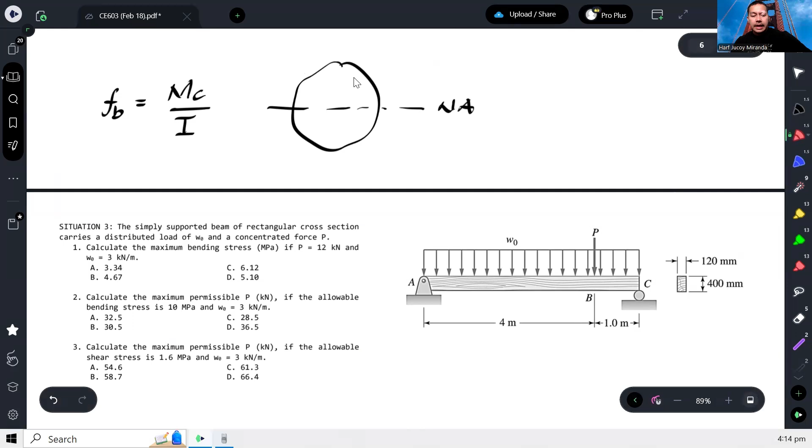Okay, yung moment tapos yung distance natin, pag sinabing C, diba. Ito kunwari yung neutral axis. So yung C is yung location nung point na hinahanapan mo ng flexural stress. Halimbawa, itong fiber na to.

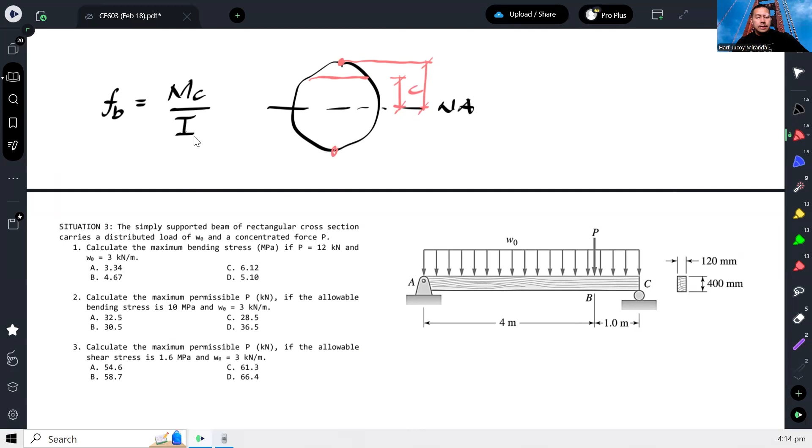So yung C is distance from the neutral axis. Pero kung gusto mo yung maximum, doon ka sa pinakadulo dapat. Yun yung pinakamalaki na C, o sa kabilang dulo. Tapos yung I is the moment of inertia. Pero bago yun, kailangan nating malaman, kasi maximum kailangan mo malaman yung maximum moment, in this case.

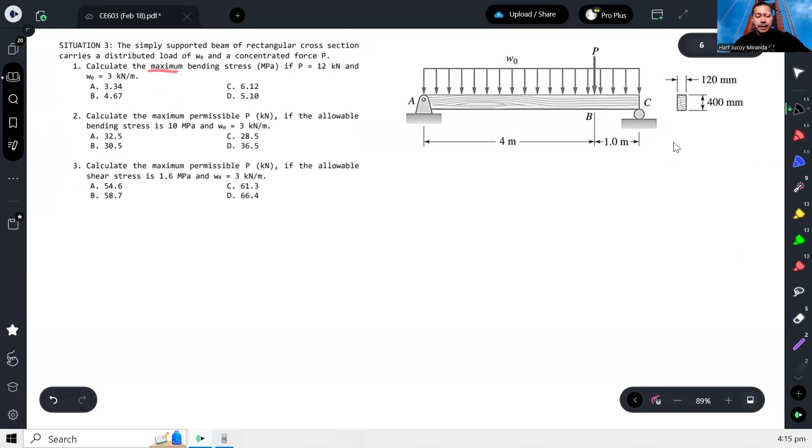So for the first problem, sabi niya W is 3, tapos yung P is 12. Okay, so kunin natin yung reaction.

Pakita ko na lang sa calcu ha. Wag na, isulat ko na para malinaw. So moment tayo sa A.

Doon naman tayo sa uniformly distributed load. So that's 3 times buong length is 5. Tapos yung moment arm niya is 5 over 2. Okay, clockwise yung rotation.

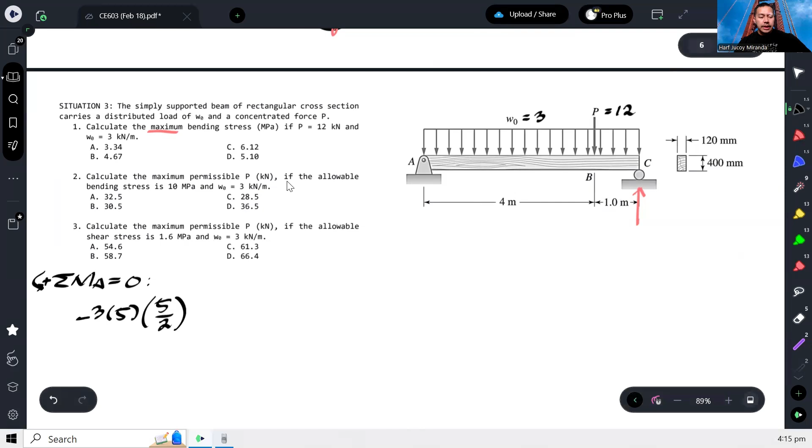And then we have 12, moment arm is 4, so again clockwise din. Itong distributed load, pababa kasi yan, so pag umikot yan dito, clockwise. Ito rin, clockwise. Tapos ito naman, counterclockwise.

Yung reaction sa C, counterclockwise, moment arm is 5. So therefore yung reaction sa C can be calculated: we have 3 times 5 times 5 over 2 plus 12 times 4, that's all over 5. That gives us 17.1.

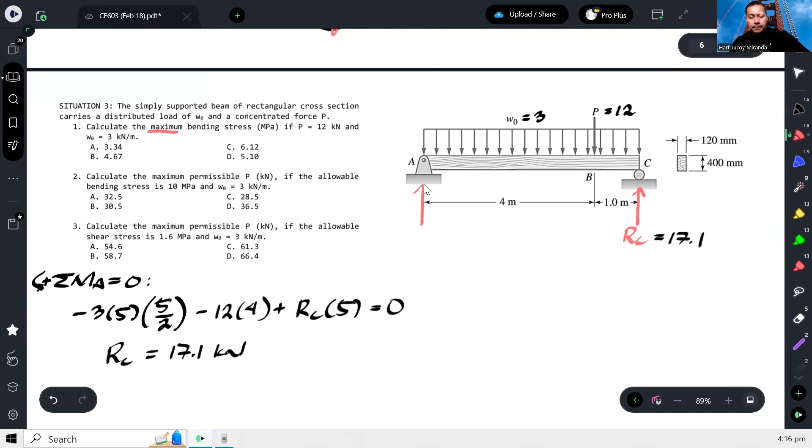Tapos syempre meron din tayong reaction sa A. Para naman sa reaction sa A, mag-summation na lang ako ng forces. We have RA plus RC minus 3 times 5 minus 12. So that's 9.9.

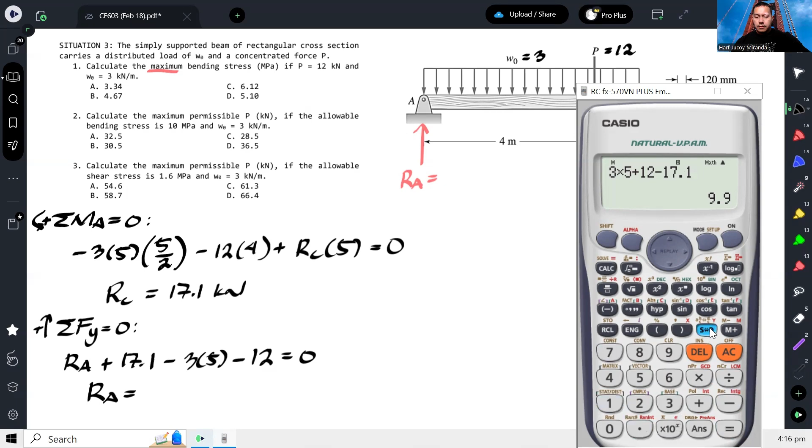Okay, ngayon pwede natin i-drawing yung shear diagram. As you can see, meron ditong 9.9. Tapos meron ibang kulay yung shear diagram.

Meron ditong 9.9, tapos bababa tayo dahil dun sa uniform load. We have 9.9 minus 3 times 4 lang muna, kasi meron ditong concentrated load sa B, so hanggang 4 lang muna. That gives us negative 2.1.

Tapos may concentrated load na 12, so bababa tayo ng 12. So 14.1.

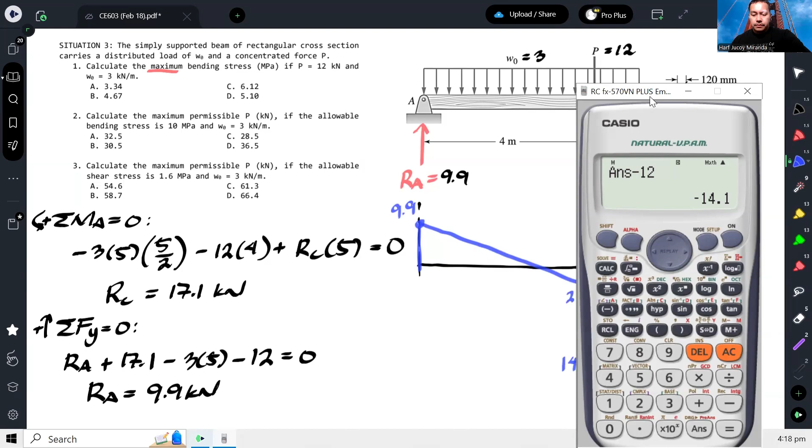Okay, and then for this from B to C, meron tayong area na—rather 3 pala, 3 times 1. So bababa tayo ng 3 times 1, 3 yung magnitude ng W. So that's negative 17.1.

Lastly, dito sa part na to, meron tayong concentrated load na 17.1 upward, so this would be 0. Yan, so yung itsura ng shear diagram natin.

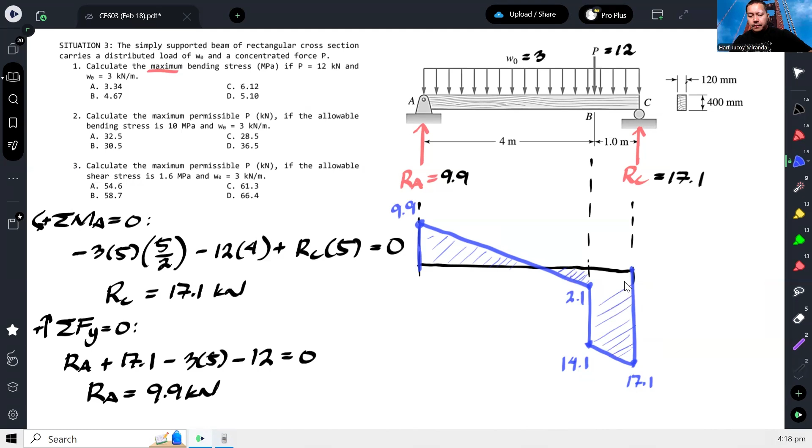Okay, so in this scenario we are only concerned with maximum moment, kasi maximum bending stress yung hinahanap natin. Dito, halata na dito yung mangyayari. Kailangan natin itong malaman kung nasaan ito.

Okay, kung yan ay x, itong kabila we will call this 4 minus x. Again, by ratio and proportion you can calculate that. Dito na lang sa gilid, x over 9.9 is equal to 2.1 lang ito.

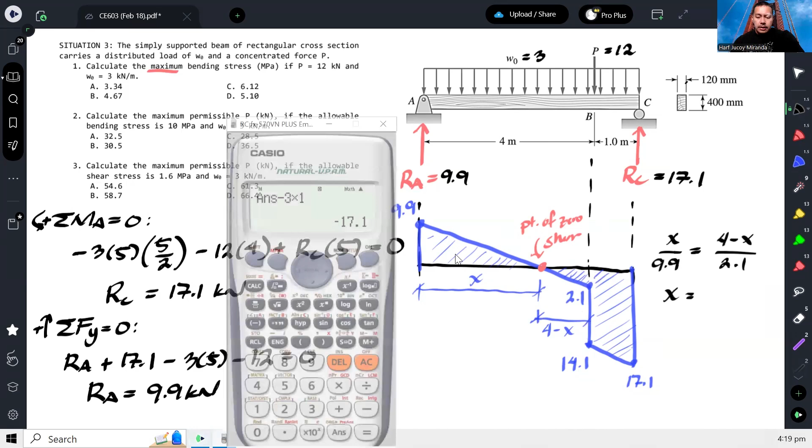Ay sorry, 4 minus x pala muna. 4 minus x over 2.1. So ma-solve mo yung x. Okay, so that's 3.3.

Okay, so from there pwede na natin malaman ano yung maximum moment. Sabi ko nga kanina, parang kung i-drawing mo pa yung moment diagram, bali ganito lang yan. Bali 0 dito yung moment, tapos magkakaroon lang yan ng value dito.

Magkakaroon yan ng value dyan, at yan na yung maximum. Kasi after yan, ima-minus mo na to, di ba. Area na to positive, so magpa-plus. Tapos pag lumagpas ka, ito negative, so bababa na yan. Tapos ito negative po, so bababa na yan, maging 0. So ito na yung maximum yan.

At yan ay area lang nito. Okay, so therefore our maximum moment is 1/2 base na lang.

1/2 base times height na 9.9. So that gives us 1/2 base times height. That gives us 16.335.

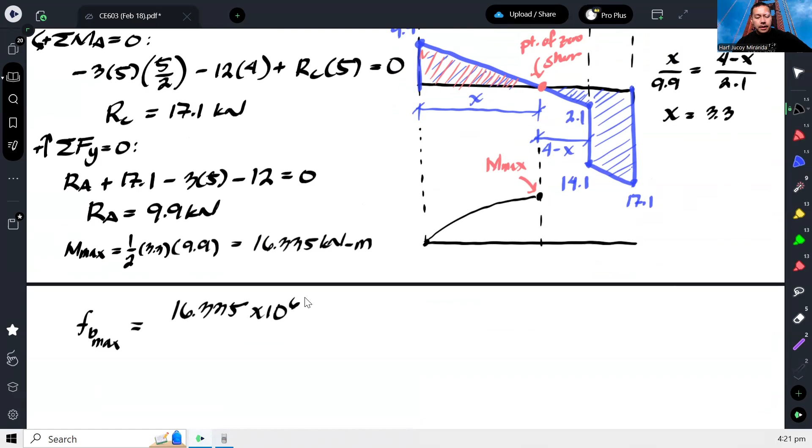Okay, so we are now ready to calculate the bending stress. The maximum bending stress would be equal to M, which is 16.335. Gagawin natin Newton millimeter kasi ang goal ko diyan maging megapascal. Yung C natin, ito yung cross-section, di ba? Lakihan ko lang. Okay, so ito ay 400. Ito ay 120.

So yung neutral axis, since rectangle lang naman, nasa centroid, which is nasa gitna. Nandito sa gitna, no? So ibig sabihin, from the neutral axis, mangyayari ang maximum bending stress sa extreme fiber dito, either sa top or sa bottom. Kahit saan naman, wala namang in-specify kung maximum compressive or tension. So basta bending stress, piliin lang natin yung mas malaking distance. In this case, parehas lang naman yon na 200.

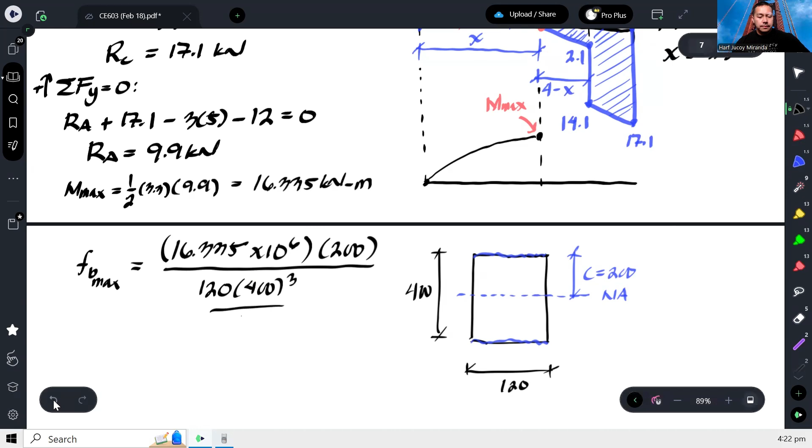Okay, so therefore this is times 200, MC over I. Tapos yung I naman natin, dahil rectangle lang yan, so BH cube over 12. Ayan, okay? So lahat naman yan naka-millimeter tsaka naka-Newton millimeter, kaya magiging sagot mo agad diyan is megapascals.

So that gives us 5.10 megapascals. Okay, so that's letter D.

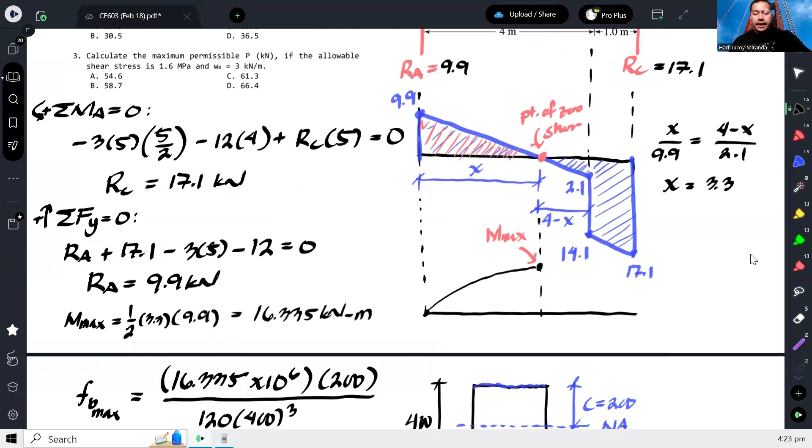Next, calculate the maximum permissible P. Oh nga pala, bago tayo mag-proceed doon, another way of calculating the maximum moment is kung ayaw mong i-drawing yung shear diagram, pero alam mo na somewhere dito yung maximum moment, pwede ka ulit mag-method of section. Ayan, okay? So pag nag-method of section tayo, kakat mo yan, isolate mo.

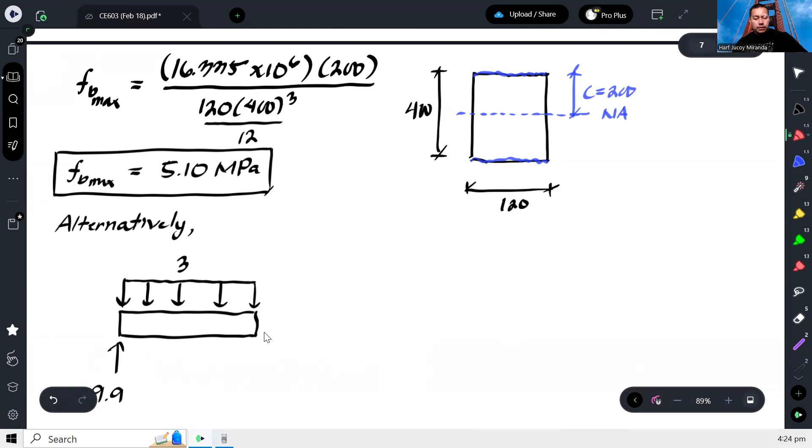Kunwari yun, kinat ko na, in-isolate ko na yung left. Meron ditong 9.9, tapos meron ditong uniform load na 3. Ayan, no? Tapos dito may expose yung shear. Pero isa-set mo na 0 kasi hinahanap mo yung point of zero shear. Tapos kung yan ang point of zero shear, doon din lalabas, ito na yung maximum moment.

Okay, tapos ang gusto mong malaman, nasaan to? Kunwari hindi mo alam, so paano mo malalaman? Again, summation lang ng forces. So we will have 9.9 upward, tapos downward yung 3 times x. So lalabas sa x ay 3.3.

Okay, pag nakuha mo na yon, pwede ka naman mag-summation ng moment dito sa point na to. Let's say point O, o wag na lang O, point M na lang siguro. Point M, assuming counterclockwise positive. So we will have 9.9 times x clockwise. Tapos we will have 3 times x times x over 2.

Kasi di ba kalahati lang ng ano nito, x, yung moment arm ng resultant nitong uniform load. Tapos yan ay counterclockwise, ito ay clockwise. Ito ay counterclockwise, and then counterclockwise yung M max. So therefore yung M max dito dapat same lang doon sa na-compute natin, which is same nga lang, 16.335.

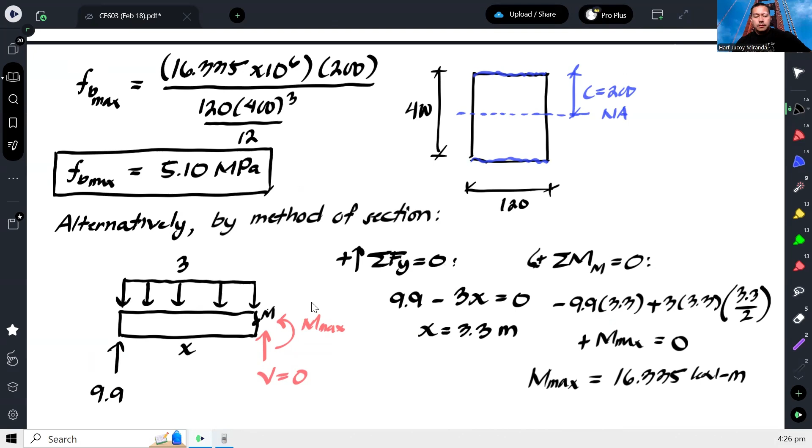Okay, pwede rin ganyan. Tapos pagkatapos ito, MC over I na ulit. Okay, pwedeng method of section, no? Okay, so that's for number one.

Number two, calculate the maximum permissible P if the allowable bending stress is 10 megapascal and the uniform load is 3 kilonewton per meter. So pinapahanap yung maximum P. Okay, so dito naman, nangyayari diyan ganito.

Kapag yung P natin hindi ganun kalaki, ganito yung nangyayaring shear diagram. So from reaction, tapos yung point of zero shear mo, somewhere dito, no, somewhere diyan, o dito, o dito. Pero kapag yung P mo is large enough, ang magiging itsura ng shear diagram diyan is hanggang dito lang, tas biglang bababa. So ibig kong sabihin, yung point of zero shear mo is kung nasaan yung P mismo.

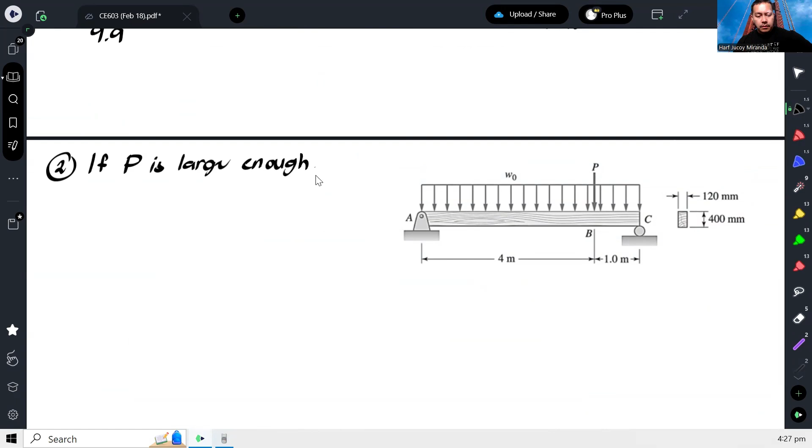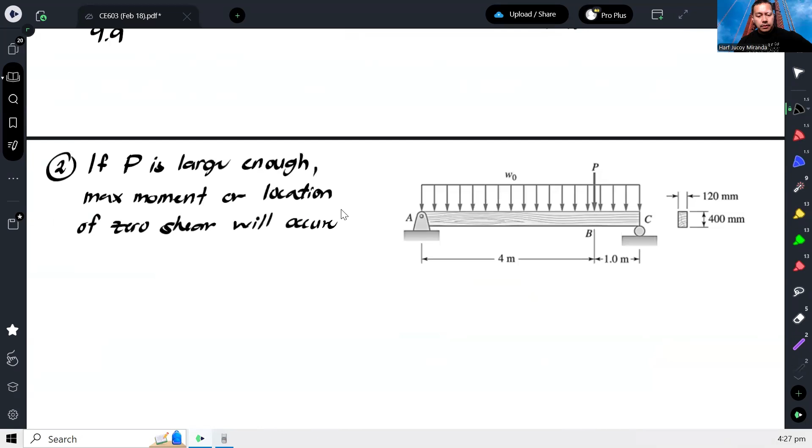Okay, number two. If P is large enough, okay, maximum moment or location of zero shear will occur under P. So ibig sabihin, ganito yung magiging itsura ng shear diagram diyan. Ganyan, so nandito yung point of zero shear.

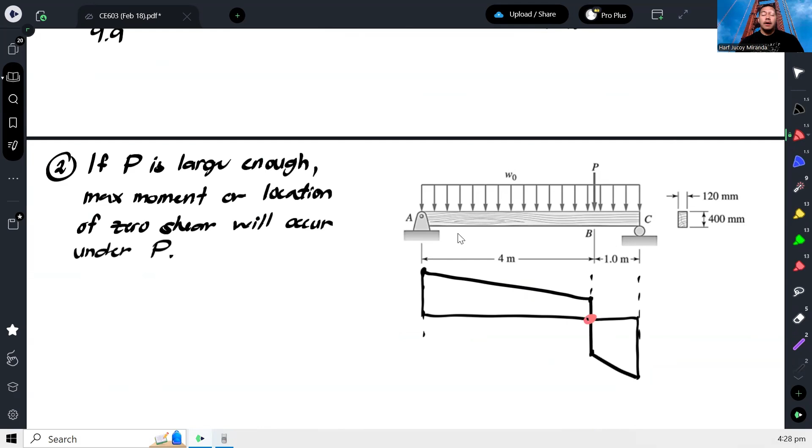Okay, and we want P to be as large as possible. Kasi di ba ang hinahanap natin is yung maximum P for a specific allowable bending stress. Parang sinasabi niya na yung FB allowable ay equal sa 10 megapascal. So ibig sabihin, yung actual na bending stress, actual na maximum, hindi dapat pwedeng lumagpas diyan sa 10 megapascal.

Okay, so and then ito ay MC over I. M, pero yung M mo maximum, C over I. Okay, pero paano makukuha yung M max? So how do I calculate that? First of all, let's calculate the reactions here and here.

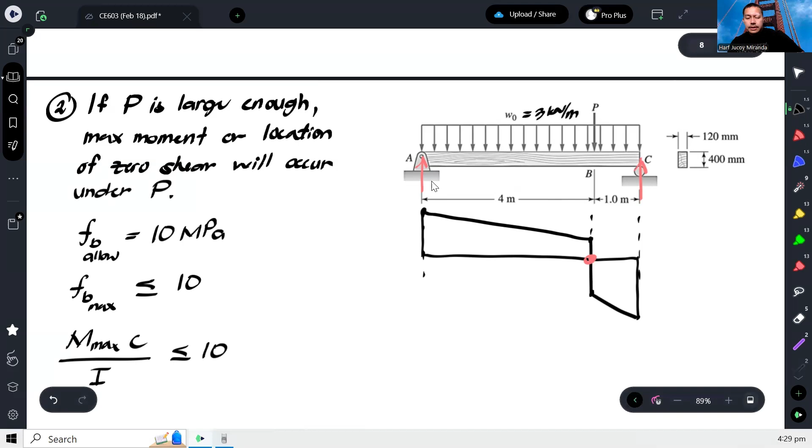Dahil alam naman natin na ito ay 3 kilonewton per meter at saka ang unknown lang is yung P, so hanapin natin yung reaction sa A at sa C in terms of P. So ito yung reaction sa A, ito yung reaction sa C. So ganun ulit, mag-moment tayo. Sa gilid lang muna natin yan.

Let's take moment at A to solve for the reaction at C. So we have 3 times 5 times 5 over 2, clockwise. And then we have P times 4, but P is clockwise. And then we have the reaction at C, which is counterclockwise, so times 5.

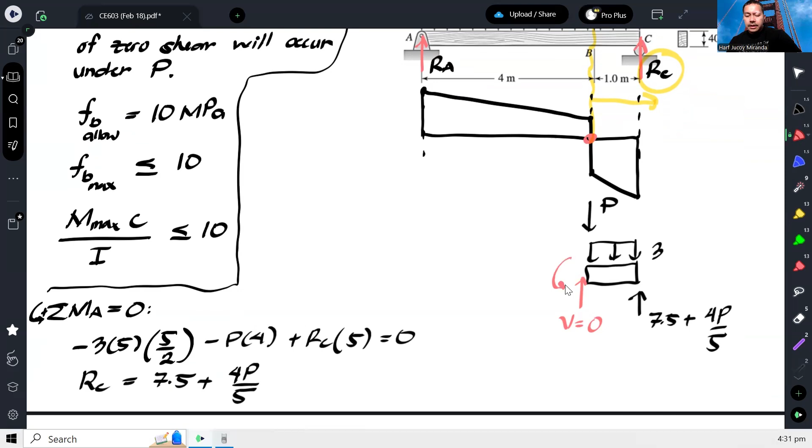So let's just take moment there. Let's call this point B, actually it is point B. So let's take summation of moment at point B equal to 0, assuming counterclockwise positive.

This P, we don't need that, so let's get this first. We have 7.5 plus 4P over 5, and the moment arm will be 1 meter, since this is just 1 meter. Then the 3 kilonewton per meter, multiply by 1, and the moment arm is 1 over 2, and that's clockwise. And then we have M max.

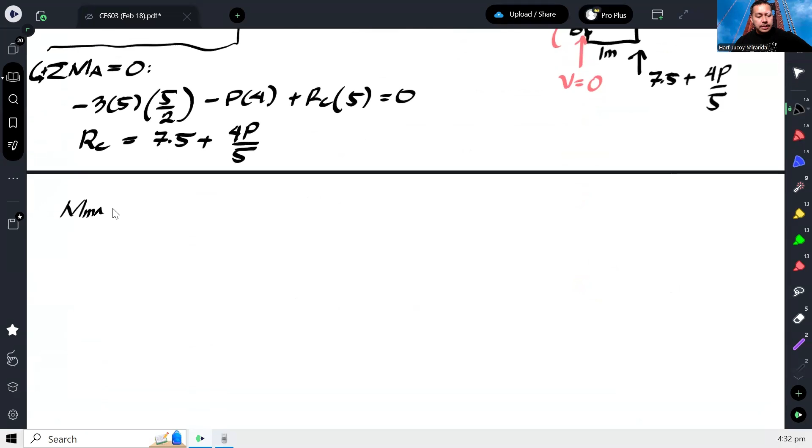So M max should not exceed this stress of 10 megapascal. I want M max in kilonewton meter, so I'll put times 1 million like before. So it turns out M max cannot exceed 10 times 120 times 400 cube over 12, over 200, over 1 million, which is 32. It cannot exceed 32 kilonewton meter.

So we'll just set that as 32 kilonewton meter and solve for P, so we know what the maximum allowable P is. From this equation, we will have 7.5 plus 4P over 5, times 1, minus 3 times 1 times 1 half, minus 32, and we can solve for P from here.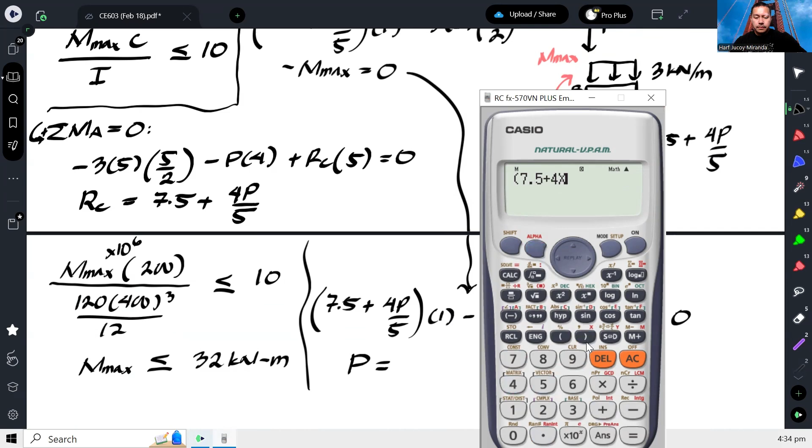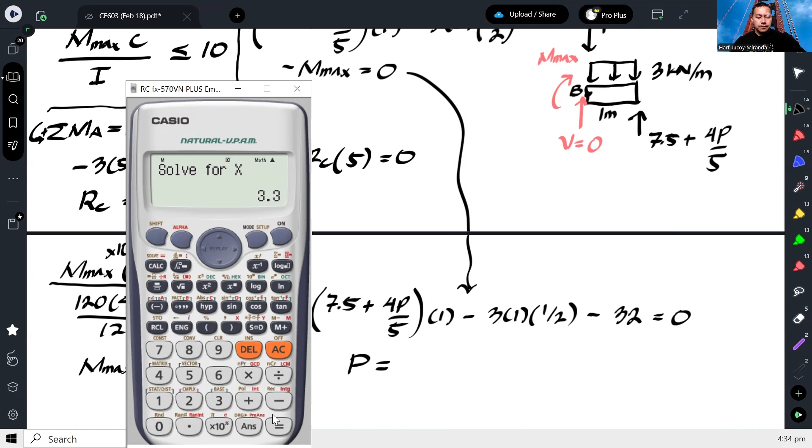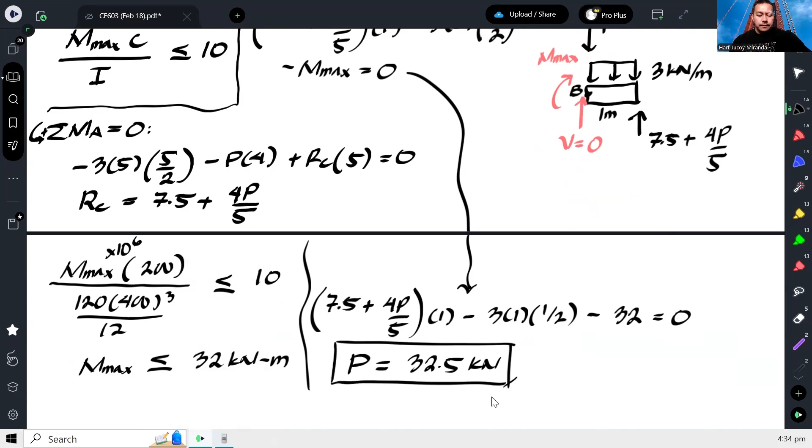So P would be 32.5. P should not exceed 32.5 kilonewtons. So the answer here would be 32.5.

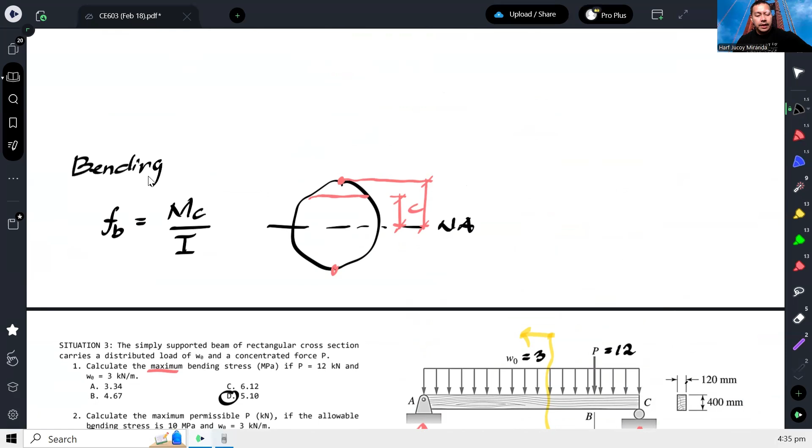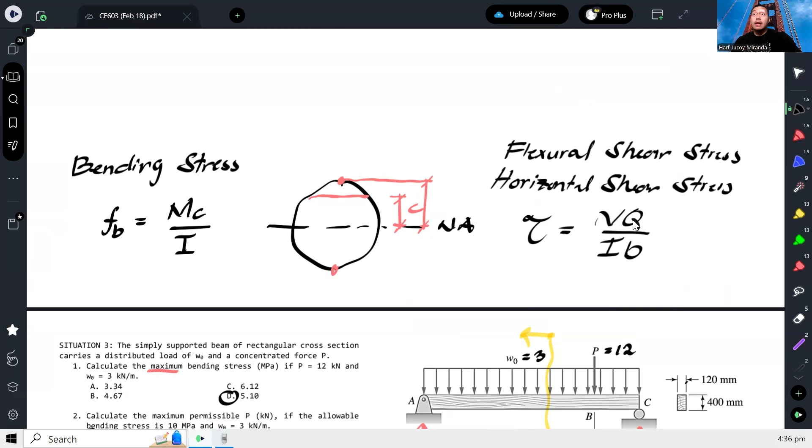So for flexural shear stress, sometimes called horizontal shear stress, that is given as VQ over IB, where V is the shear force, Q is the statical moment of area above or below a fiber with respect to the neutral axis. For example, I want to find the shear stress here.

Okay, ano yung shear stress sa fiber na yan? So ang gagawin mo, yung Q na yon is kunin mo yung area above or below. Kunwari, above yung gusto mong kunin. Tapos i-moment mo from the neutral axis, yung moment arm niya, yung centroid na yan. So yung Q ay equal sa area nito, area times yung Y.

Okay, tapos I is the moment of inertia and yung B naman is yung width ng fiber. Yan yung B, kung ano yung lapad ng fiber na kinoconsider. Okay? And then most of the time, nalalaman, for rectangular sections, yung maximum shear stress occurs at the neutral axis.

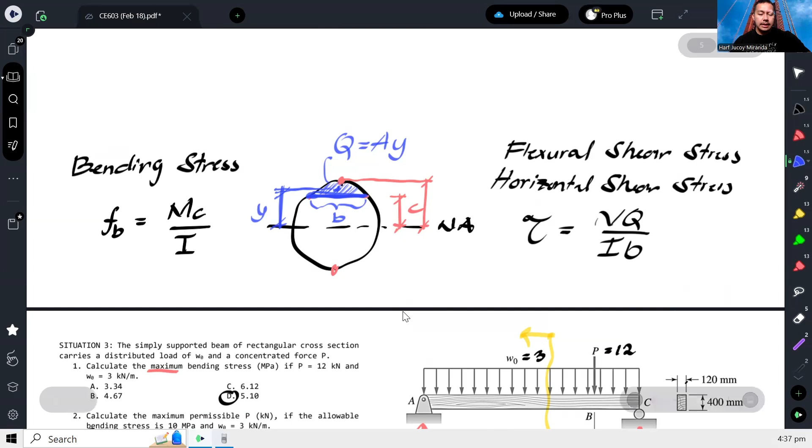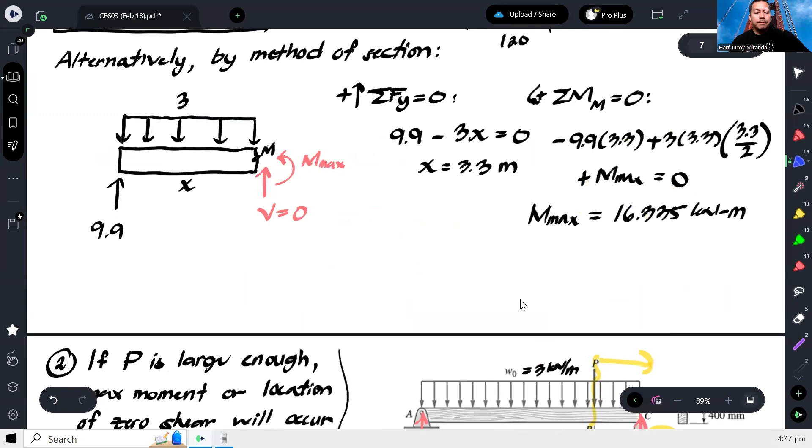Alright, so ngayon identify natin. Ano daw yung P para hindi lumagpas tayo sa allowable shear stress na 1.6. Okay, so first, do sa formula, number 3.

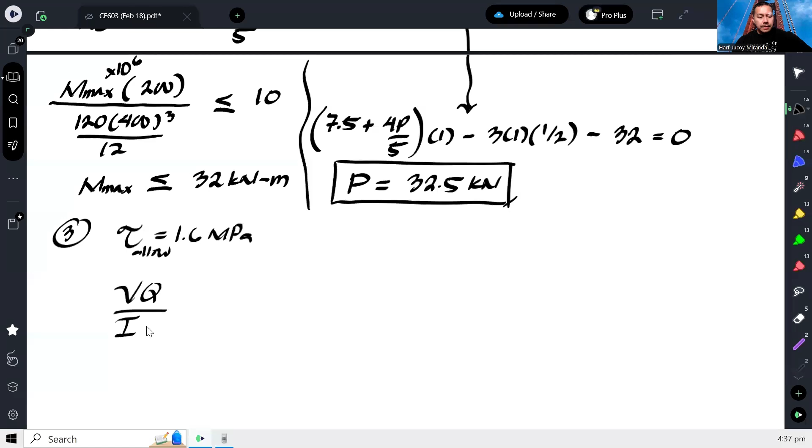Okay, so dapat yung VQ over IB hindi lalagpas sa 1.6. So una na kagad natin tignan, ano yung V? So ganito pa rin yung mangyayari, na shear diagram natin, yung V natin dyan na pinakamalaki, alin kayo mas malaki? Ito ba or ito? Dalawa lang naman, is either ito or ito. Well actually, makikita kagad natin na mas malaki dapat to. Dito dapat yung Vmax.

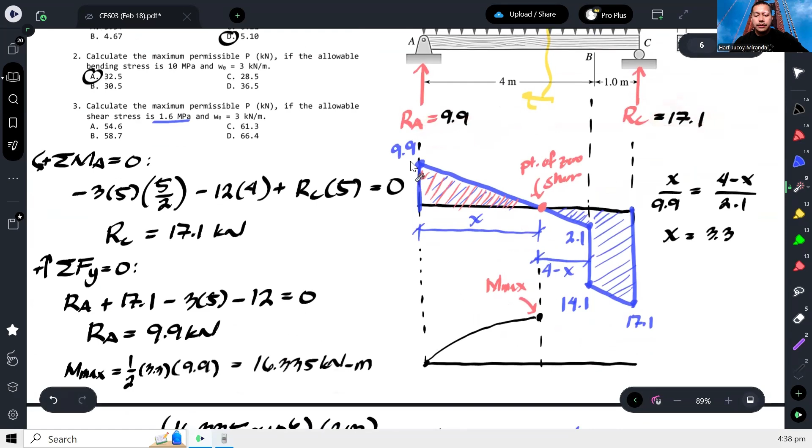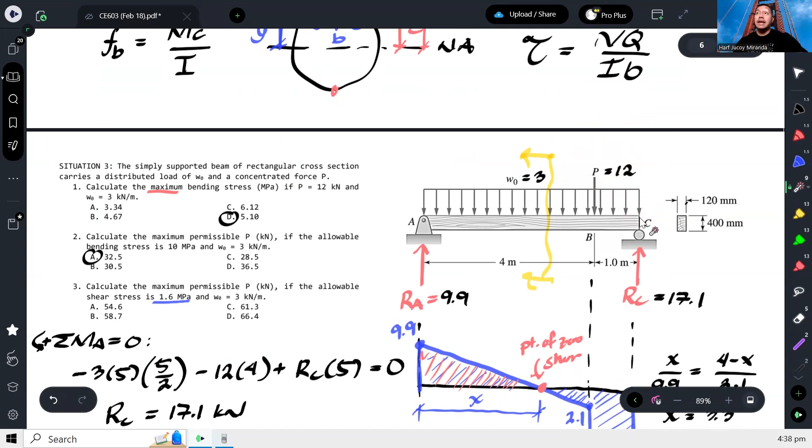Bakit? Although hindi pa natin nakikita yung value, tandaan nyo to, mas malapit kasi yung applied force dun sa kanan. Kaya sigurado tayo, mas malaki yung reaction nito kaya compare dito. At nakita naman natin sa number 1. Sa number 1, di ba, tingnan nyo, yung reaction natin sa kaliwa, 9.9. Yung reaction natin sa kanan, 17.1. So lumalabas, yung shear force dito, pag kinumpare mo dito, mas malaki na sa kanan. Ang quick explanation nun is kasi yung P, mas malapit dun sa kanan. Ganun naman yun eh. Kung saan mas malapit yung force, dun mas malaki yung shear. So therefore, sure tayo na ito yung maximum shear.

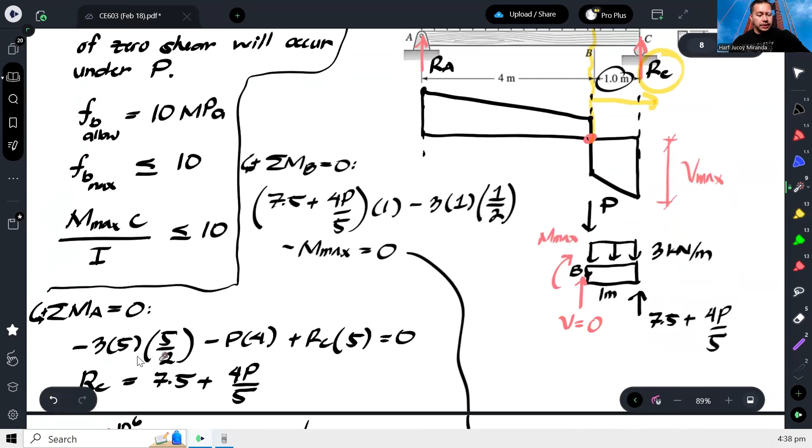Kaya lang, ano yan? Ano yan? Hindi ba ginawa na natin yon? Ito yan eh, saan na yun? RC, ayun, ito, ito yan. Yan din yun, okay, so therefore, lumalabas na yung Vmax natin, 7.5 plus 4P over 5.

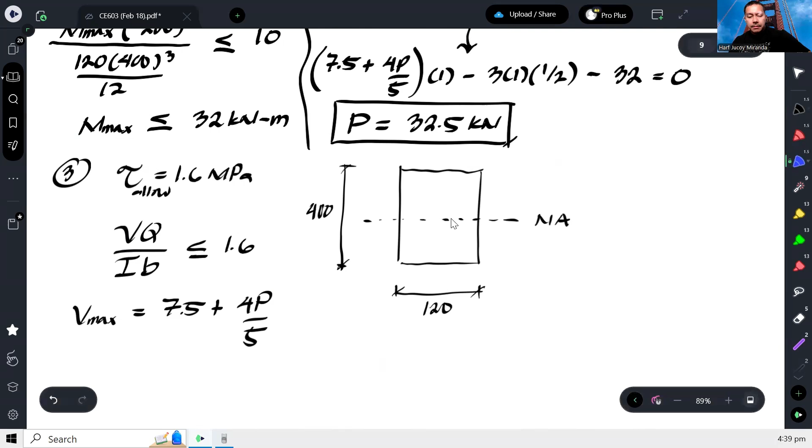Okay, tapos yung Q, ano yung Q? So ito, kunin natin yung section. Ito yung neutral axis, nasa gitna. And sabi ko nga, dyan mo matatagpuan yung maximum shear kapag rectangular section. Okay, so ibig sabihin, ito yung fiber na kailangan nating makunan ng shear stress. Okay, so lumalabas ngayon, doon sa B, ito yung B, yun yung haba ng fiber. Tapos, yung Q is yung moment of area above or below that fiber with respect to the neutral axis. So ibig sabihin, kung above yung i-consider ko, ito.

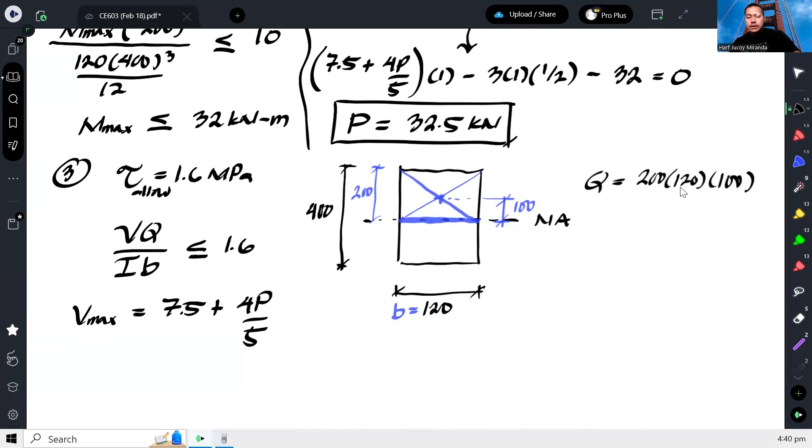Yung centroid niya nandito, which is nasa, from the neutral axis, it is going to be, kasi 200 na lang to eh. So ibig sabihin, 100 na lang to. Okay, so therefore, yung Q naman natin dyan will be yung area na itong above na to, which is 200 times 120. Tapos yung moment arm niya from the neutral axis ay 100. So bali, ito yung A times Y.

Okay, that's your Q. Tapos I, madali na yung I, yung B, okay na. So ilagay na natin lahat. So this will be 7.5 plus 4P over 5. Gawin natin tong Newton kasi kilonewton talaga to eh, so mag-multiply tayo ng 1,000. Tapos yung Q natin ay 200 times 120 times 100 over I.

Yung I natin is BH cubed over 12. Tapos yung B natin is 120. And that should not exceed 1.6 megapascal. So dito, since naka-Newton and millimeter naman na to lahat, sure na tayo na megapascal yung magiging equivalent na units niyan. Kaya all we have to do is to calculate P from here. So P should not exceed. So cross-multiply lang naman yan lahat, tapos divide.

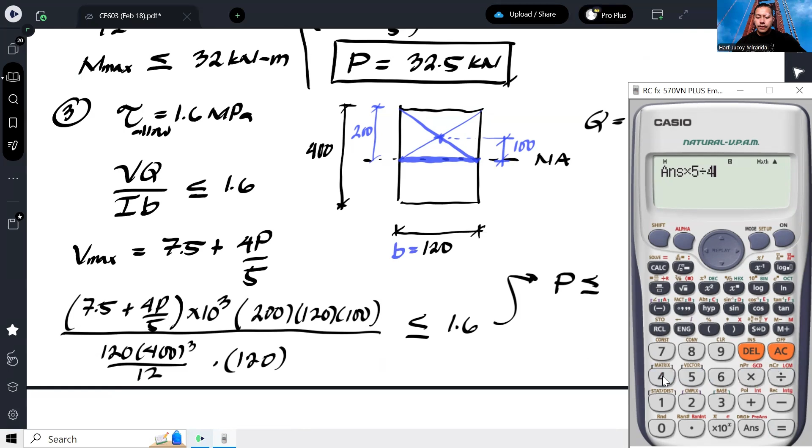So, to 1.6 times 120 times 400 cubed over 12 times 120. Pag yan cross-multiply lahat, tapos divide pa natin ng nitong Q, 200 times 120 times 100. Sama na natin dito yung 1,000. Ayan, so ito ngayon yung ano natin, shear force. So sa part na to, ima-minus mo naman yung 7.5. Tapos cross-multiply 5 tsaka 4, so times 5 over 4. So lalabas na P ay 54.625.

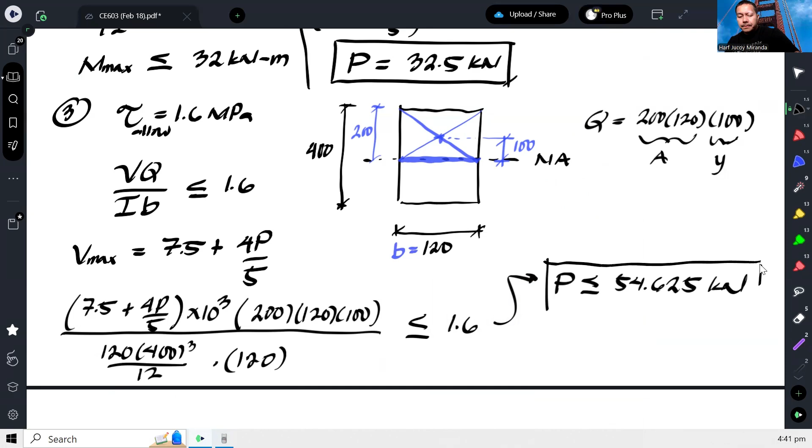So yun yung maximum permissible. Okay, so ang sagot natin dito would be 54.6 na hindi pwedeng lumagpas doon. So well, ideally, yun yung sagot natin.